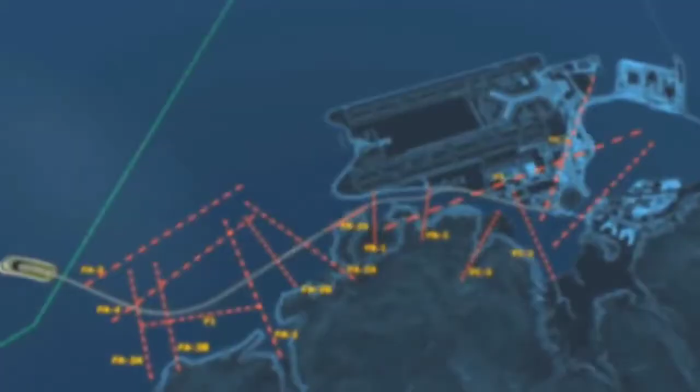Thank you guys for being here. Today I called you for a special reason. Here is one sample of a bridge. Based on this, we will create a newly designed bridge.

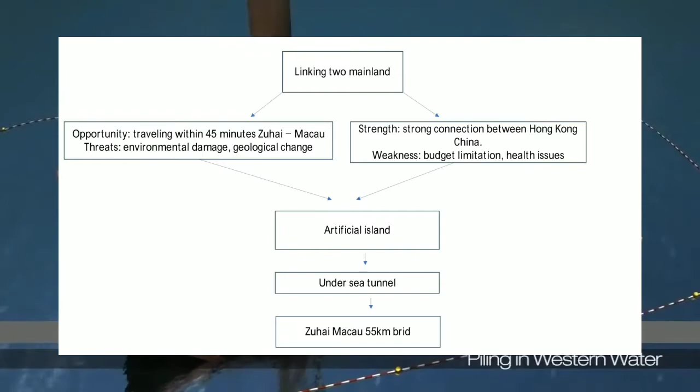After analyzing external and internal factors, we came up with a solution to make a 55 km Hong Kong, Zhuhai and Macau bridge. We created a project scope which will investigate the Hong Kong and Singapore bridge, and we will create our Hong Kong, Zhuhai and Macau bridge.

We will create a long-term connection between Zhuhai and Macau. We'll also build a conceptual, long-lasting design meant to last 120 years. The deliverable is a connection between three regions on one platform, reducing travel time.

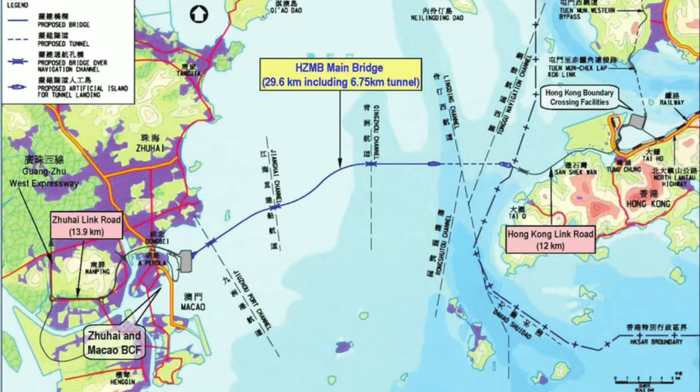Our milestone is to start construction on 15 December 2009 and expect to finish by 2018. The technical requirements we need are for large spans, like 14.55 millimeter sections, and tunnel placement.

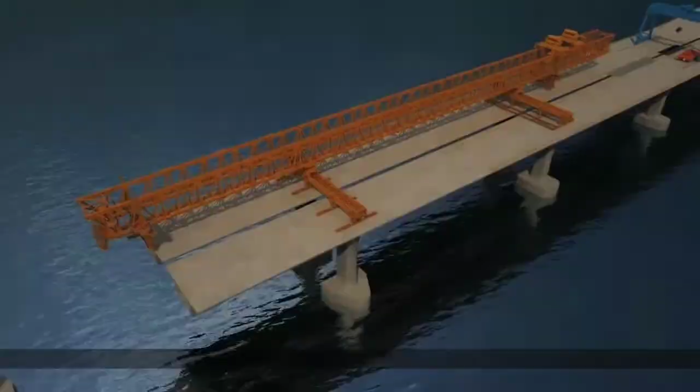We also have to observe the tunnel conditions and create a defensive wall, and we have to mix the deep sea level work with pile and soil investigation. We also have to consider the strong chloride ion conditions in sea water, high water pressure, accidental loads, internal force, and construction.

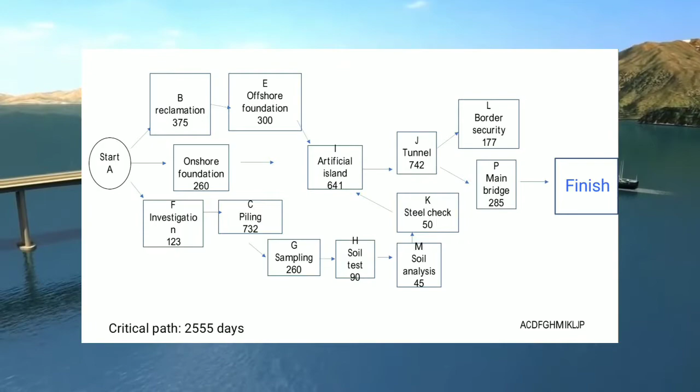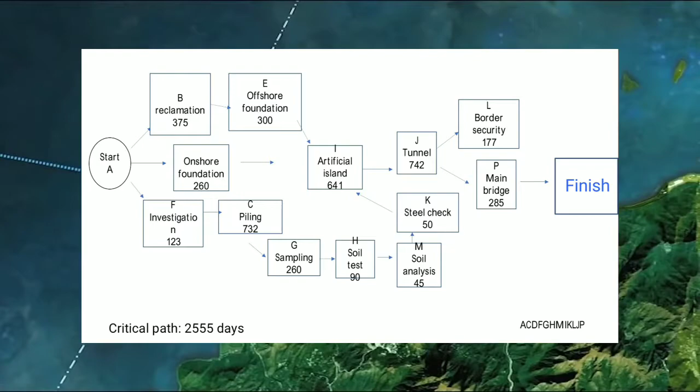According to the activity-on-node analysis, we expect our work will be finished within 7 years, which is 2,555 days. Is everything clear, guys? Okay, that's our project.

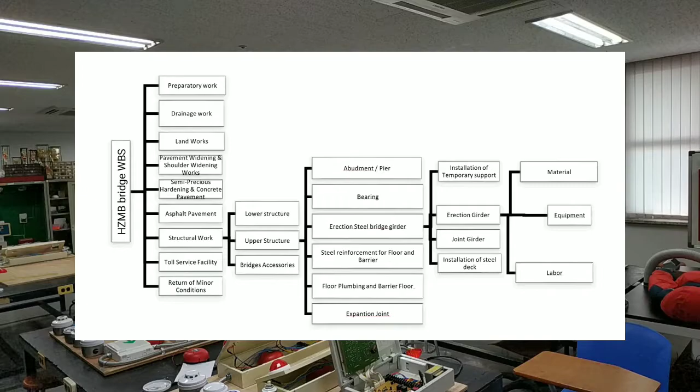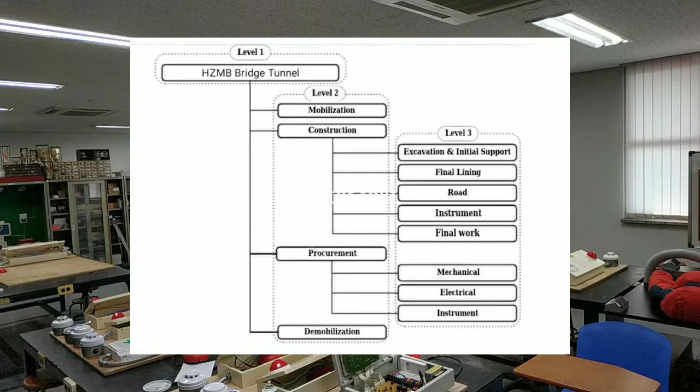The tunnel includes a big plan which we are going to do, such as excavation and initial support of the crown, excavation and initial support of the bench, and reinforced concrete invert, etc.

Also, the structural design of the artificial island is developed integrally and interactively. In the following sections, the design is described in two main directions: the transverse and the longitudinal direction.

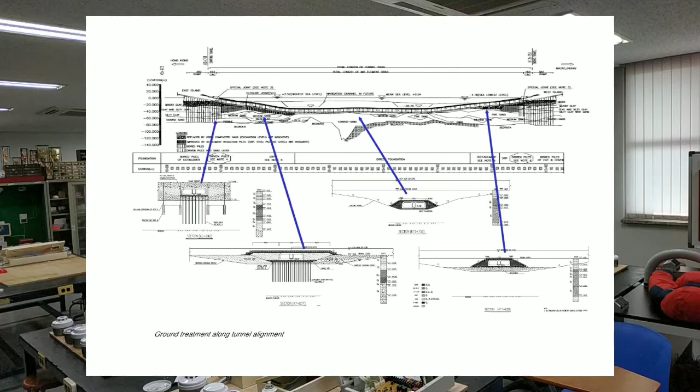The project budget was $15 billion, loaned from a Hong Kong bank. The budget was distributed into 5 main categories. The first is design of the project, at $3 billion.

This category was also divided into two parts of $1.5 billion each: one for the bridge itself and one for the main island. The next category was supply, at 50% of the total budget, which is $7.5 billion.

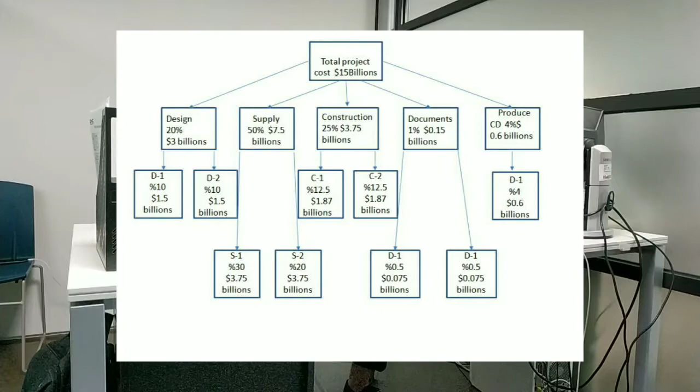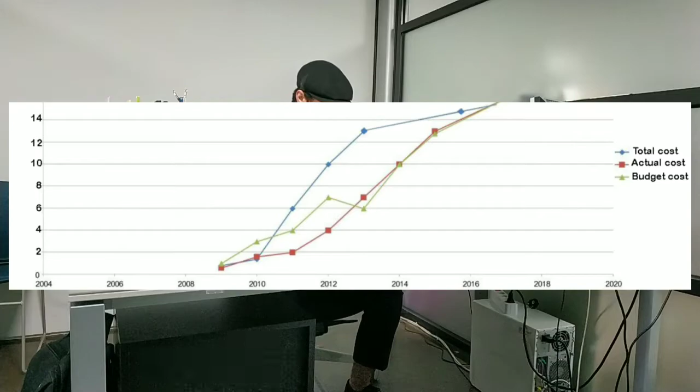The third category was for construction, $3.75 billion for both the bridge and main islands. The fourth was for documents, for the beginning and closing parts, $0.15 billion. The last category was for produce CD, at 4%, which is $0.6 billion.

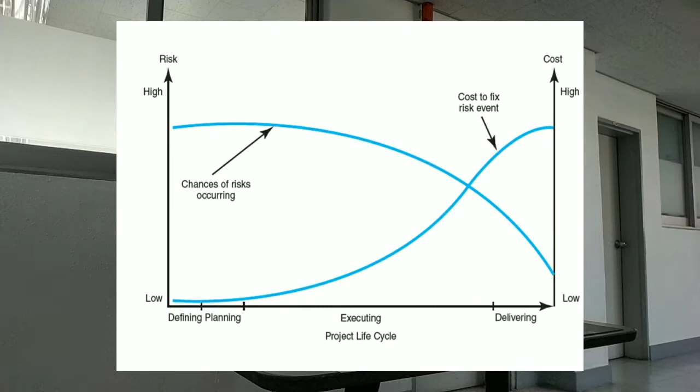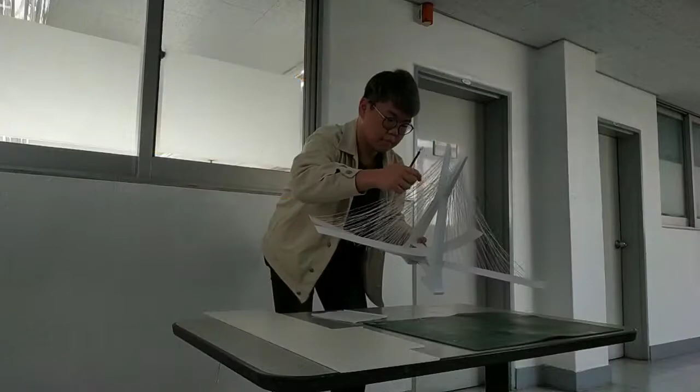If we focus on low cost, the bridge could be completed with poor quality, and the project might not be finished on time. On the other hand, if we pay high cost, the quality of the project will increase and the project must be finished on time. In our management process, we have 4 steps.

First, we have to identify sources of risk, for example, risk of money flow and the quality of the bridge. Second, we have to assess the risk, such as whether it's controllable for us to fix the financing, that kind of thing.

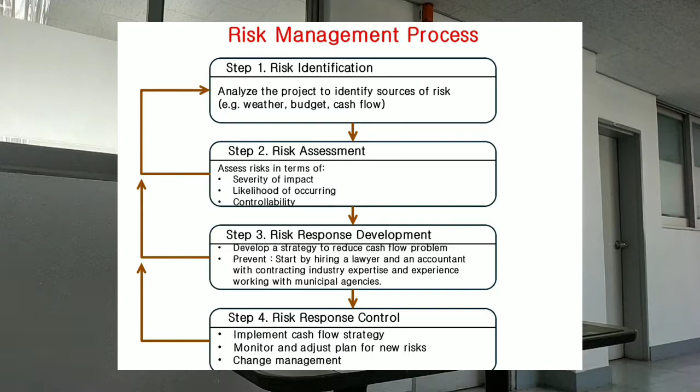Third, we respond to the risk development — we check what the problem is for our project and the possibility of fixing the risk, then we try to find how to reduce the problem. The last factor is responding control about the risk, so we try to prevent the coming risk.

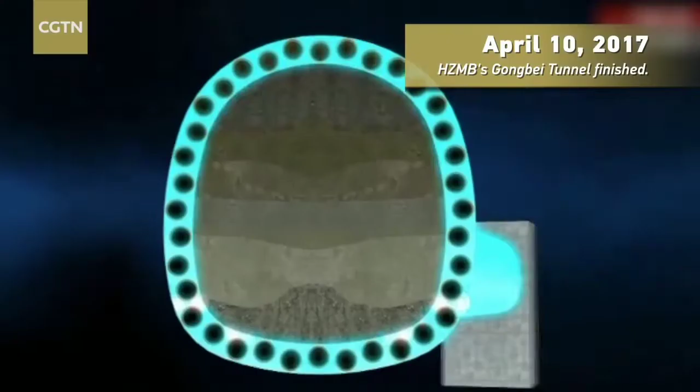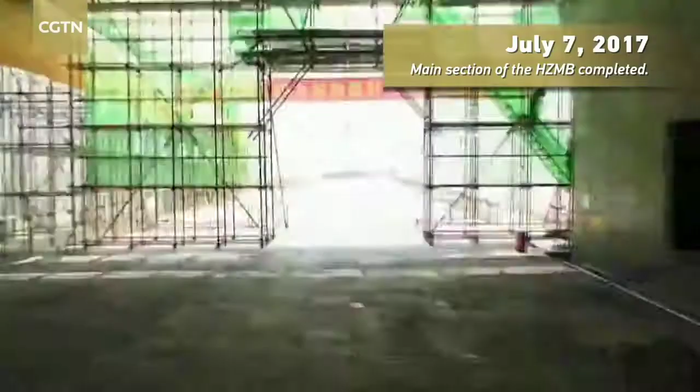After years of delay and budget overruns, the multi-billion-dollar Hong Kong Zhuhai Macau Bridge is now one step away from operation. An opening ceremony will be held next Tuesday, although it's not known if the link will open to the public on the same day.